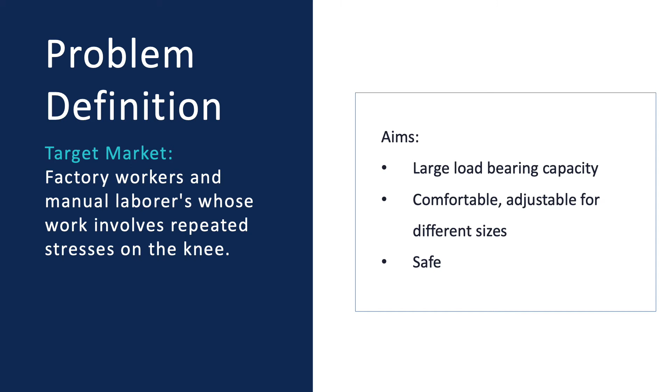In order to narrow down and quantify particular specifications, we broke down our initial needs assessment into 2 parts, production side and user side. On the user side, we focused on making the product safe, durable, and affordable. As we mentioned earlier, we aim to design fail-safe mechanisms, redundancy, and an ergonomic, well-fitting brace to ensure this.

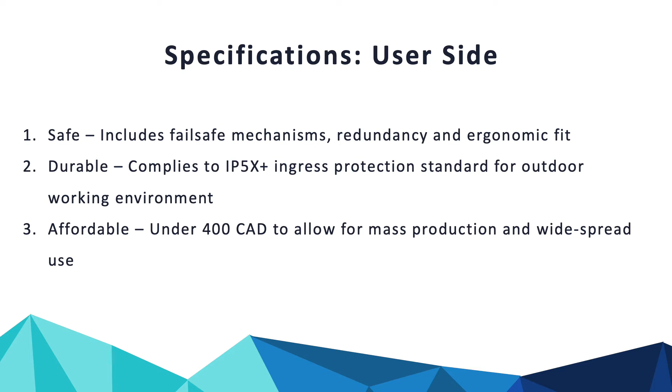We also specified that the brace should have a lifetime of at least 2 years and comply with an IP5X+ ingress protection standard to ensure it can be safely used in outdoor environments. We also aimed at having a lifetime of 2 years, or about 36,000 load cycles. Additionally, we aimed to make the device and production process relatively affordable. Specifically, we aimed for it to stay under $400, the given budget for this project.

The needs from the production end are focused on the technical design aspects, processing speed, and load-bearing capabilities. We concluded that the total response time should be less than 8 milliseconds, which allows for 3 milliseconds for the device to intake and process motion sensor data, and then 5 milliseconds between the control signal reception and the motor actuation. In terms of load-bearing capabilities, we determined that a functional prototype should be able to output a minimum of 50 pounds of upwards additional force.

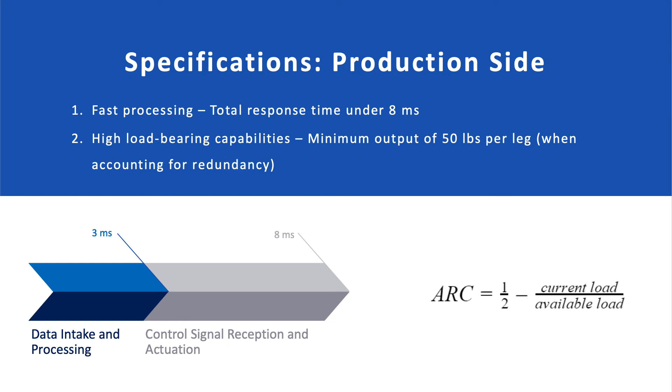To obtain control and information about the user's knee position, we needed a platform that interfaced between the user's leg and the actuation and sensing system. This component must disperse highly concentrated stresses of the actuator along the user's leg to avoid injury.

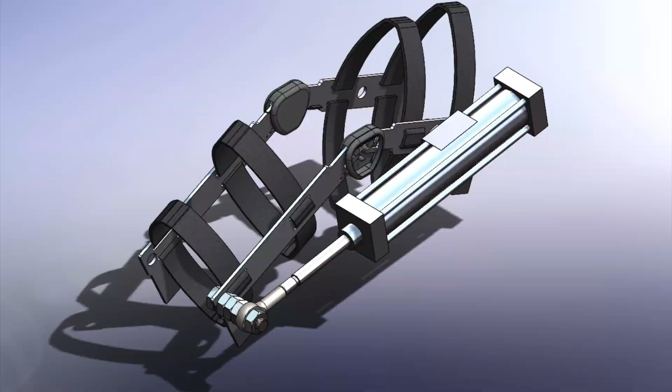The structural elements of the system can be split into 3 main design elements: the hinge, the structural bars, and the straps. The hinge was designed to mimic the movement of the human knee joint as closely as possible. Spur gears at the end of each structural bar interlock in a 3D printed housing, which also holds an interior plate with rubber beams.

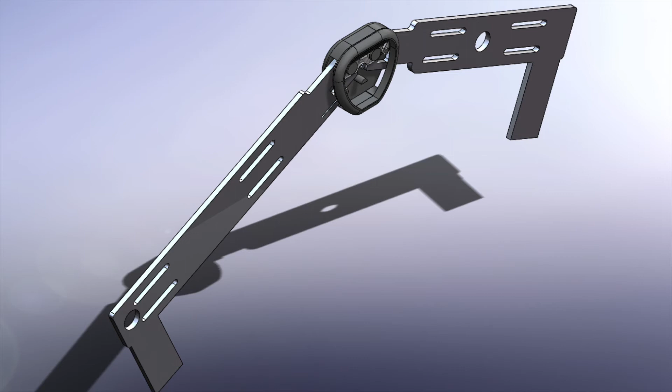Second, the structural bars. Made of aluminum 6061, the bars are designed to minimize stress concentrations and deflections due to the actuation force while remaining light and manufacturable. These parts interface with the straps, which serve to eliminate the difference in position between the user's knee and the structural bars. To augment user power output, we use a pneumatic cylinder.

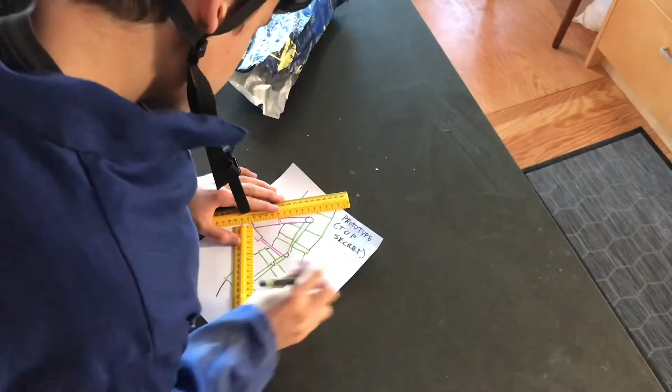At 29.9 psi, based on the geometry of the fake leg, the expected vertical force output at the hip was approximately 50 pounds. Restriction on the testing meant that we were unable to verify this calculation. The pneumatic system for controlling the piston consisted of a ball valve, a pressure regulator, an air filter, a 3-way 5-port normally closed solenoid valve, and 2 adjustable flow control valves.

During testing, the plan was to adjust the valves to match a median extension or contraction velocity, and then control speed by opening and closing the solenoid valve. The intrinsic compliance of the pneumatic system can dampen sudden stops and starts to create a more continuous velocity distribution.

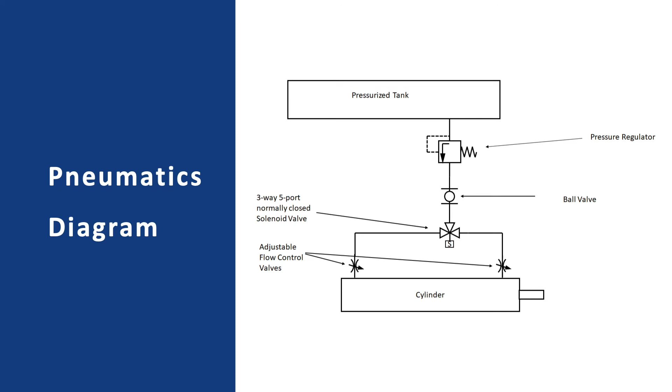To control the actuators, our device uses a network of several sensors placed along the brace. We use a combination of 2 LSM6DS3 6-degree of freedom IMUs and 1 BendLabs digital flex sensor to read the angular position, acceleration, and orientation at 3 separate points on the leg. This data is fed into the Adafruit Huzzah32 Feather, which pre-processes the data to remove invalid readings.

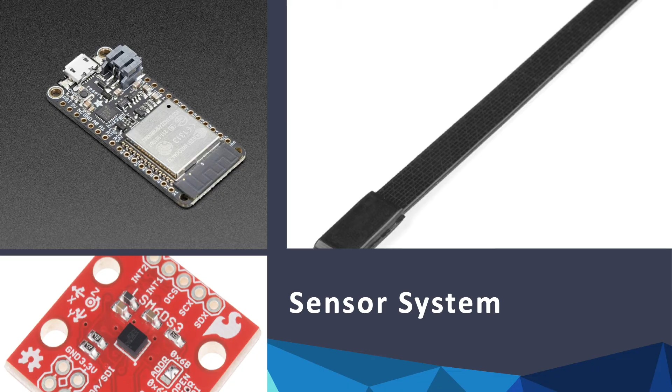From here, the data is sent over Wi-Fi using the OSC protocol. While originally designed for use with audio equipment, OSC allows us to easily and efficiently send numerical data through UDP packets with minimal losses. The components communicate with the central controller using I2C protocol. We considered sourcing sensors that use analog outputs instead, but we determined that for the small additional cost, the greatly decreased software and system complexity of the I2C boards was worth the cost.

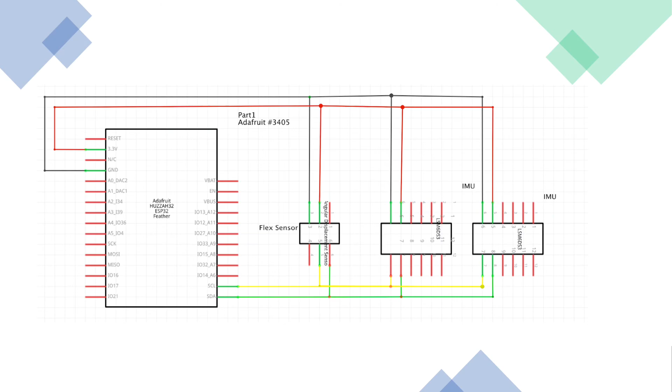The software system was developed in order to convert the readings pulled in from the sensor system into commands for actuating the piston. In order to collect data, we had a user squat and move with the brace and classify when it should be actuating or not. This allowed us to perform supervised machine learning to predict when the user wants motion. Typically, the data is already collected and then applied statically. In this case, the data was collected on an initial prototype and was used simply as a proof of concept.

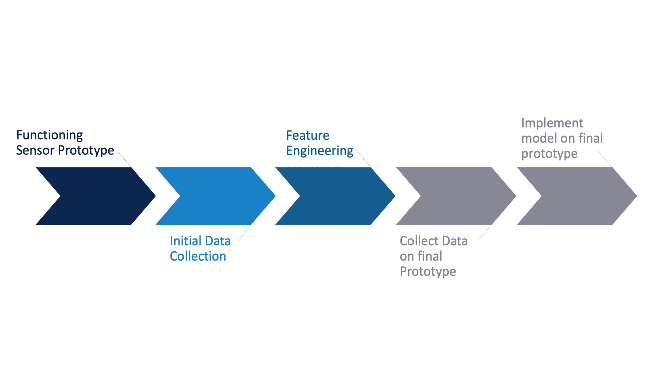Going into the initial data collection, we knew that we would have to run the machine learning software on a new dataset. This strategy still showed basic trends within the set and allowed the team to optimize hyperparameters and begin feature engineering. This allowed us more time to develop the model throughout the year rather than doing the bulk of the coding and data analysis on the final brace model.

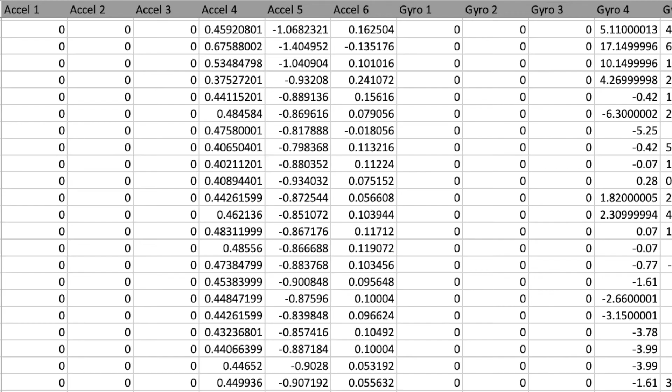The final model used AdaBoost, which is based off of random forest. We were unable to collect data on the final motion prototype. Nevertheless, we were able to achieve an accuracy of 98% in the sensor to actuator model using the early prototype's data. This indicates that the final product would have functioned as intended.

We hoped with this project to make an exoskeletal design that could provide the same functionality as existing designs at a fraction of the cost. This would make the design far more accessible for mass production and widespread use for various applications. While we likely would have exceeded our initial budget of $400, we predict that the initial prototype would have remained below $500, and thus well below similar exoskeleton projects.

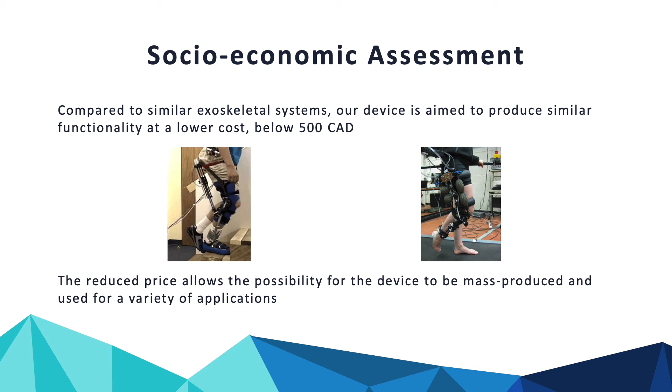By keeping the cost significantly below the current market price for similar exoskeletons, we can also potentially lower the functional cost for large companies by replacing larger machines and helping laborers do manual work at a faster rate. By extending the scope of the project to include other types of motion, we could also expand into other applications.

To expand the design even further, we would recommend first exploring ways to validate ethical testing methods to verify it is comfortable and functional for everyday use. While we can test the brace fit and load-bearing capabilities using a testing jig, it would be beneficial to study how the brace feels on an actual person.

We could also look into adapting the design to support other types of motion, such as walking or climbing stairs. This would include adapting our algorithm to recognize different sorts of motion, or including some sort of switch or dial to allow the user to manually indicate the change. It may also require adaptations to the actuation system, especially for periodic movements like climbing stairs.

As the academic term was shortened, we weren't able to complete a fully integrated prototype. However, we were able to finalize physical prototypes of the necessary electrical hardware and an early model of the machine learning algorithm. While we couldn't complete a physical brace or an actuation system prototype, we were able to model these systems in CAD software, estimate a bill of materials, and virtually design a testing jig.